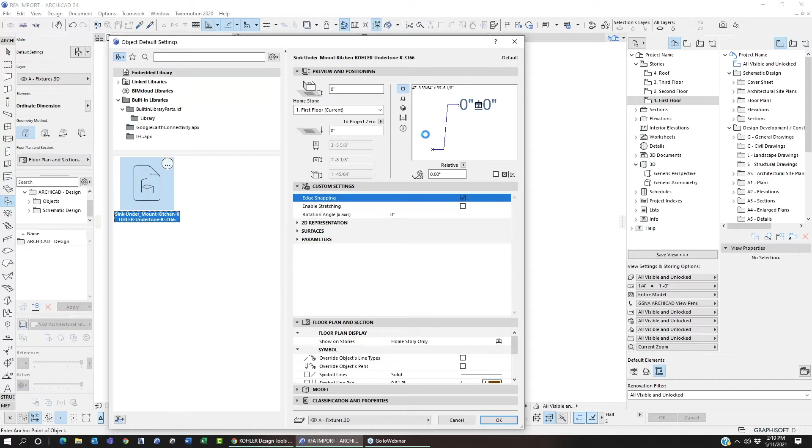And there it is. So it's just said that it's been created and it's been added to the embedded library. I'll hit OK on that. Go to the object, double click on this, and you'll see here under embedded library that that part has been put into the library there, and it's got quite a few polygons here, but I'll just show it in 3D.

That's it, and it's got some information in here as well, some parameters that come through with it. We can kind of use this, and it has a few other settings in here which we can turn on or off, edge snapping, stretching, things like that. But I'll just hit OK, and I'll place it in here.

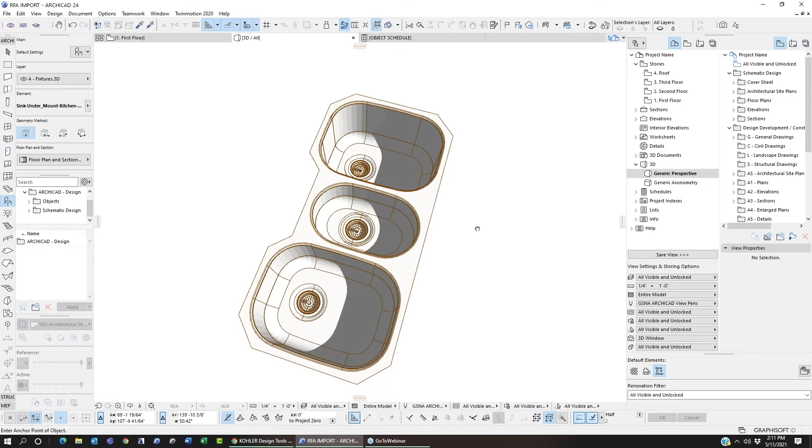There it is. Yeah, so if we just take a look at this in 3D, show all in 3D. Yeah, you can see there that this was just the medium quality, so it's not completely... it's a little segmented, but I think you'll find that it will still render quite nicely.

I'll just render it quickly here. So it'll show up pretty well here in a full render. The curves, the segments are pretty unnoticeable, and the quality is really pretty good.

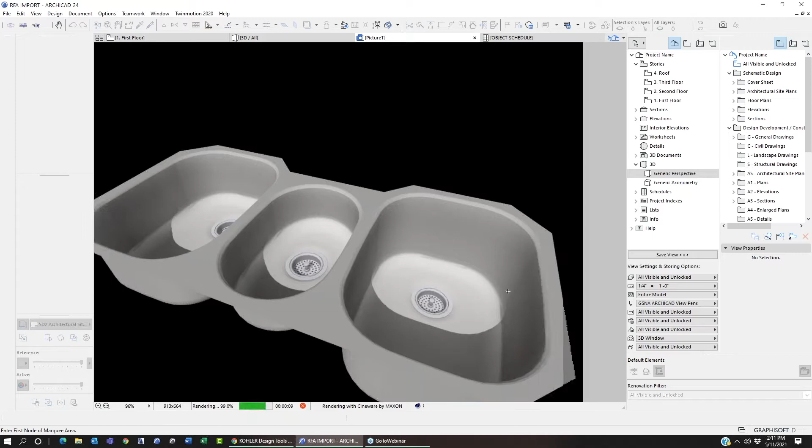And also I've got a schedule here, and this will just list out some of that information, those parameters that were available for listing. So you can pull this information out into either a schedule or into labels. So all that comes through as well. That's as easy as it is.

You just got to make sure that these RFA objects are not too old. I think we can go back as far as 2011 up to 2020, I believe, is the latest one that we have. So if you're having trouble with it, it's probably because it's a really old RFA object. But if it's reasonably new, then it should work just fine.

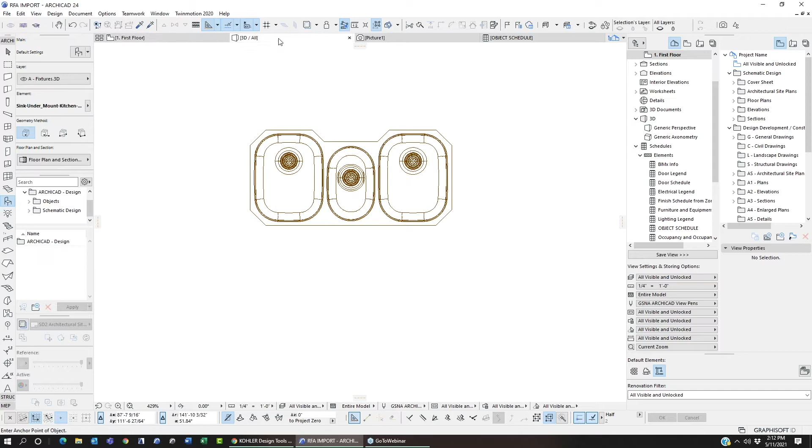Yeah, thanks, Link. And as Link pointed out, there's a ton of manufacturers' objects out there in this format. This add-on is very simple to use. Again, it's free. You know, use it in your toolkit.

What we'd like to do now is introduce Tom Simmons from ArchVista, who's going to take objects to another level with a great add-on called Modelport that I know Link and I have a lot of our clients that use. So we're going to turn it over to Tom here, and he's going to show you how you can do amazing things with a wide variety of objects with this add-on.

Tom, I just switched over to you. Let me know if you're all set. I've got it. Thank you very much. Perfect. So let me just go ahead. You can't hear me? Can anybody hear me? We can hear you. Okay, so everybody can hear me. All right, thank you. Okay, so let me go ahead and show my, sorry about this, guys. Looks like it's showing on the wrong screen. So I'll go to the main screen.

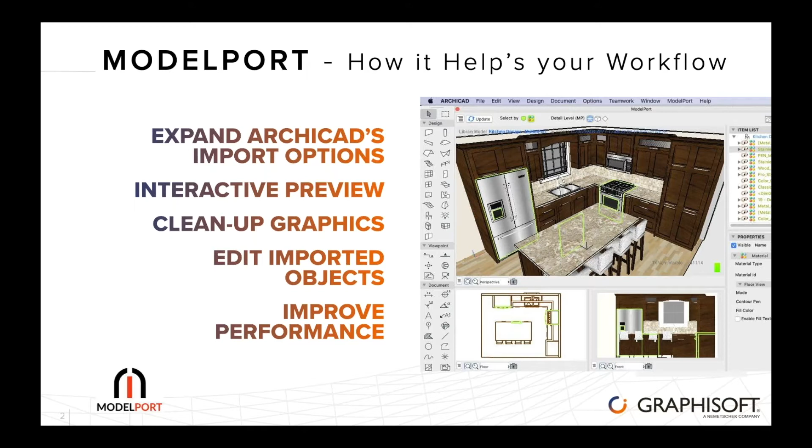Okay. So yes, let me just go ahead and take you through this. My name is Tom Simmons. I'm with ArchVista, and I'm going to take you through Modelport. Modelport is an application that we developed with some developers, and I'm going to take you through how it expands some of the import objects, offers interactive preview, cleanup graphics, edit import objects, and improves performance.

So let's just first start about expanding the import options. So many of you talked about bringing in SketchUp files, Revit files. There's a lot of file formats out there, and one of the reasons why this was developed was that a lot of people want to bring in even additional objects beyond SketchUp and Revit, and also be able to manage those objects in terms of graphics, in terms of performance for polygon counts, file size, etc.

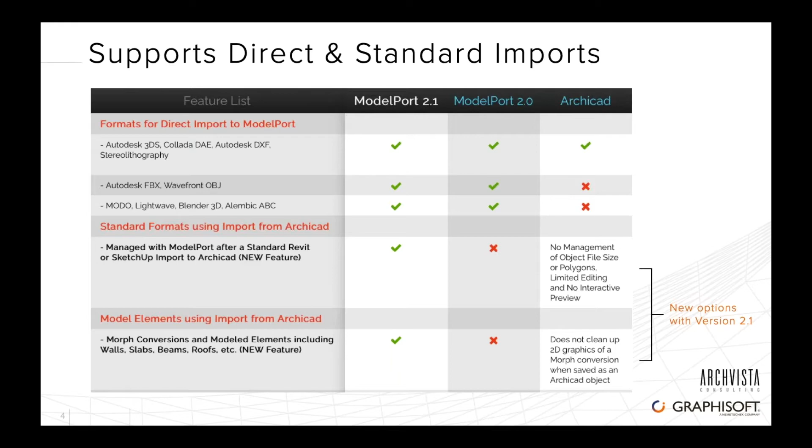And so we developed it for that purpose, and we just recently added, as was released just the last couple of weeks, additional formats. So you bring in a Revit object or SketchUp object through the standard method you would in Archicad, and now you can bring that into Modelport to use the editing features and the management features there. And then you can also likewise bring in morphs and other things that I'll talk about why that's important in a second. Let's talk about the direct import first, okay?

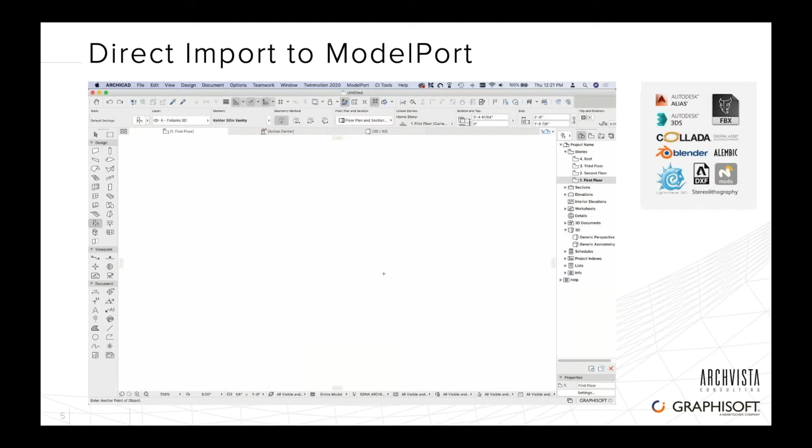If we're going to use Modelport to import, let's say, a 3D model using the DAE format. Now, the DAE format, if you're not familiar with it, is a standard format in the SketchUp 3D Warehouse. So you can either download SketchUp formats or the DAE. It's a Collada DAE format. And so you can see it brings it in pretty cleanly using Modelport in that format.

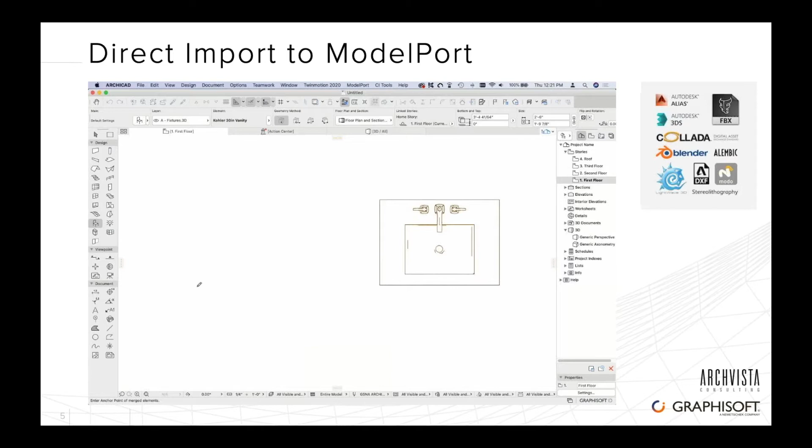But if we use the standard SketchUp format from the 3D Warehouse, this is going to look very typical of what you would probably see with any object that you're bringing in from SketchUp or any other format that has curves to it. And that's that you're going to see this sort of triangulation in the object, both in 2D and 3D, and it can get really messy. And that's part of what we tried to do with Archicad with ModelPort, is to try to clean up some of those graphics.

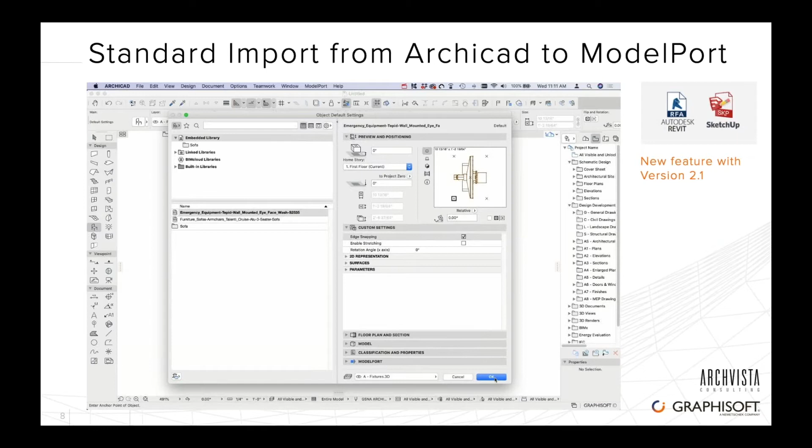We also recently, as I mentioned, allowed now for you to be able to import an RFA or a SketchUp file using the standard Archicad process. Now, why would you want to do that? Well, first off, let's say, for example, you have a Revit object, and it comes in, and it's great, brings in all the stuff, except that there's something wrong with it. Perhaps it's rotated in the wrong direction. Something that happens a lot of times: people leave things on that you can't turn off. Various reasons why.

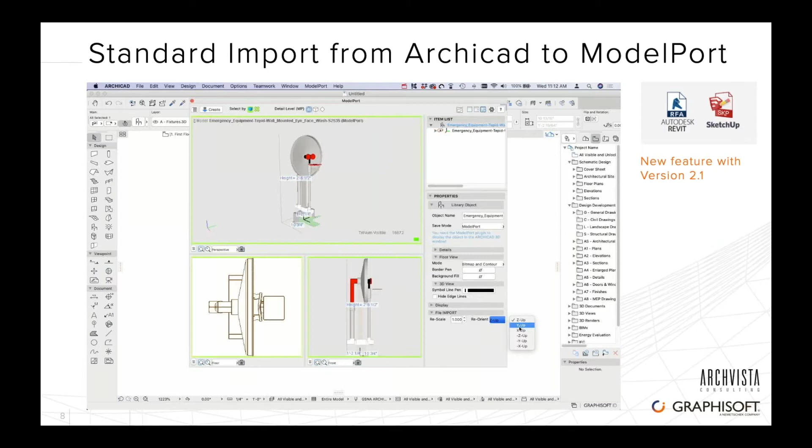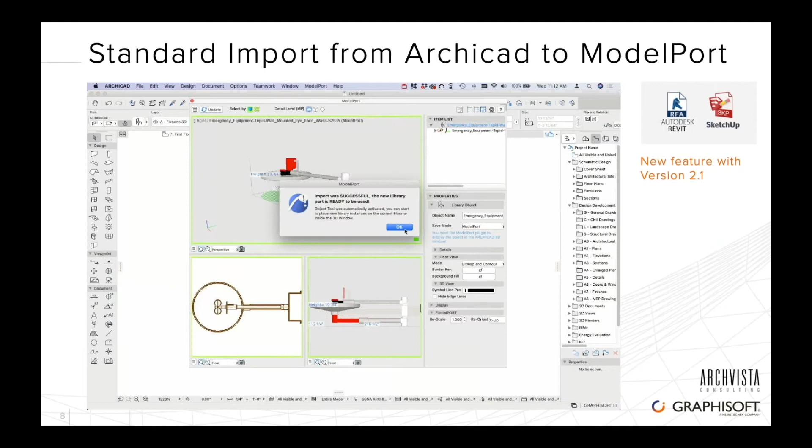And so you could explode that into a morph, edit it like that. Or with Archicad, with ModelPort now, you can also just import it directly into ModelPort and begin to use ModelPort's feature set to be able to change, in this case, its rotation, but you could also use it for editing the graphics, as I'm going to show you in a second, and some other options as well. So here we've imported it to ModelPort, and so we'll just basically delete that Revit one that we brought in, and we'll just place the one now in ModelPort, and there you go.

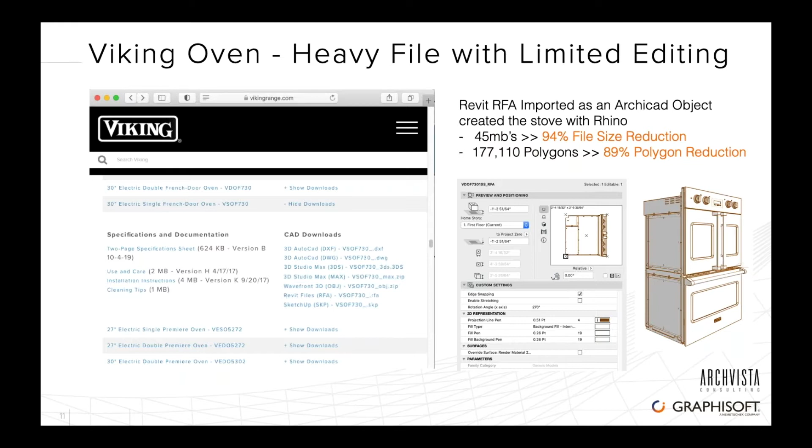So what can you do with that? Well, that's what I'm going to kind of show you. You can actually use ModelPort to reduce the file size, you reduce the polygon count. I'm going to talk about this process. So let's take a first look at what you could do. You could bring an object like this in, and you can convert it to a morph. You know that when you convert it to a morph, sometimes it will actually have a massive amount of information also, because the morph becomes, as this warning is telling us, it can decrease the performance of your project. So here's how you can handle that.

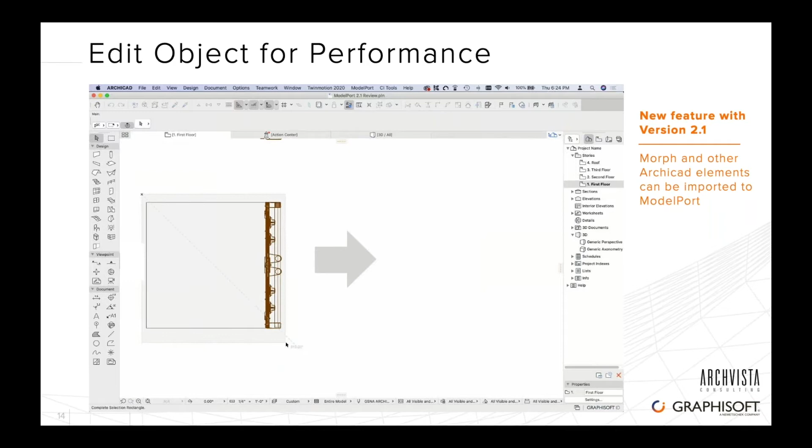This is a good example. We brought this in, we've converted it to a morph. So what we're going to do to kind of help start to simplify and increase the performance of this object, I'm going to delete the back side of it. I don't need that. I'm going to draw a slab as a representation for the back part of that oven. And just by doing that, I've already decreased this by about, I think it's about 60, 65% in size.

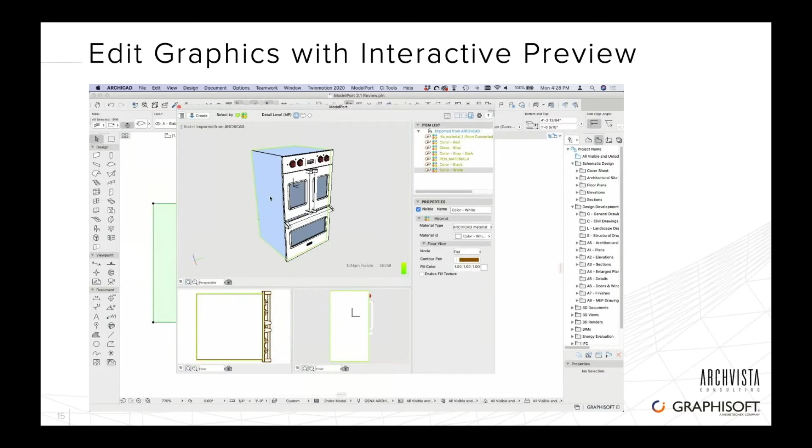I'm going to import that in now to ModelPort, and you're going to see once it comes in that rather than it being 177,000 polygons, it is now 58,000 polygons. So good first step. Next thing we're going to do is this object, when it came in from Revit and from Viking, really didn't have any colors to it. So we're going to start adding colors, adding materials, begin to add some graphics to this and edit the graphics for it as well. And then we can zoom in.

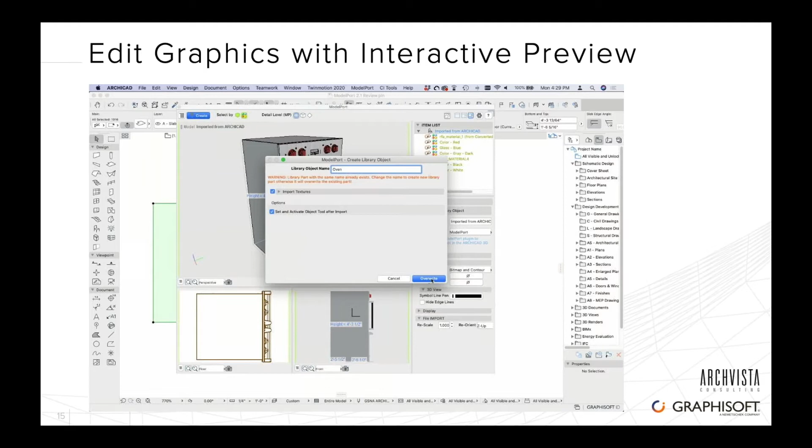This is an interactive preview. So we can click on any surfaces, any elements in here, and begin to edit those. And so here we're going to actually go ahead and change these handles to a darker metal, maybe black. And again, start to build this up, right? So now I'm going to go ahead and create this object. So now I've taken this morph, a Revit object, converted to a morph, and now I'm going to make it into a ModelPort object from this point forward. Okay. Once this is done, and this object has been created, I can close this.

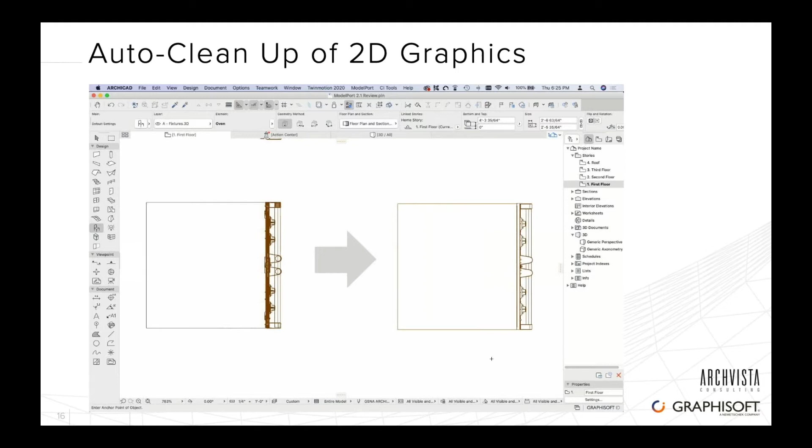And I'll go back to Archicad. And now at this point, we're going to go and place the object. And notice how much it's cleaned up too. After taking that morph, bringing it into ModelPort, just like we did earlier with the SketchUp object, using the DAE format, it's cleaned up the graphics in 2D and 3D. So next we want to reduce the polygon count.

Another new feature that's been added, because we can now bring in morphs and other elements, is we can go through and select all the meshes at once versus having to select each individual one. So in this case, if I want to reduce the polygon count, I want to select all meshes. I can select all meshes, and then I can deselect by holding down my Shift key.

I can deselect some of the surfaces so that when we start to reduce the polygon count, it doesn't create triangulation on those surfaces. So I'm going to select what's called poly reduce down underneath the detailed full panel. And then once I've done that, I'm going to change the decimation steps here, okay? So you can see there, this has reduced it down to now 19,000 polygons, down from 177,000.

Huge amount of difference. I can even take it further, down to 14, but I don't really need to take it that far. You can see it starts to create some little triangulation there, so I don't really want to do that. So I'm going to take it back up to 2, which is the default. And then I'm going to go ahead and freeze the poly reduce. So I'm saying I want to now update this object with that. And then finally, I'm going to update the object itself, and we're ready to go.

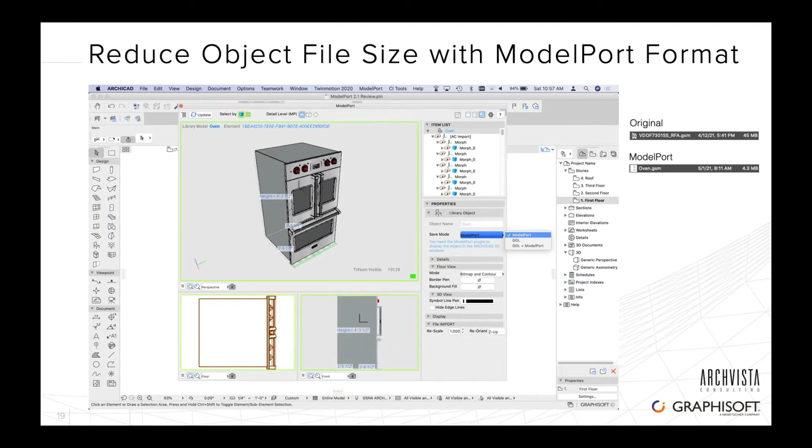Next, I also want to reduce the file size. Again, this is a pretty big object. Just as a single object was 45 megabytes. When it comes into ModelPort, we have the option to be able to set the save mode to ModelPort versus the default GDL format. Just by doing that, I'm reducing it also now back down from that 45 megabytes that we started with down to 4.3 megabytes in this final file that we're creating. Huge difference in the two.

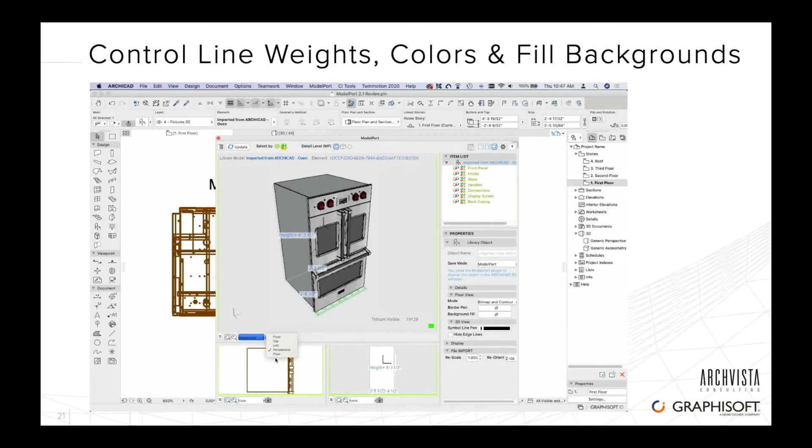We can also control line weights, colors, and fill backgrounds with these objects when we bring them in. Now, when I brought this morph in originally, you can see it's kind of true line weight mode right now. But when we go into ModelPort here, we can start to actually change our preview to show the plan view on top. And now I can start to select the areas that I want to change. So maybe I want to change, for example, the casing in the back to have some gray fill background so that we can change that.

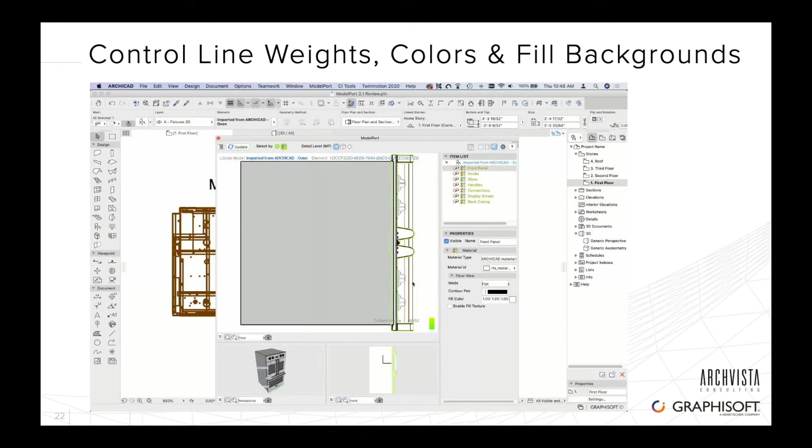Maybe I want to change the line weight of the stoves to have a heavier weight around the edge of that casing and the edge of maybe some areas up top that are closer to you. Maybe I want to gray out some of the areas that are below, so those kind of fade away. So again, I have control over here on the different materials that are part of this. And so by updating this now, what I'm going to see is a gradation of the different line weights within this object, giving me a much better look and feel for what I want to see in the end.

So final result here, it's giving me more options for importing different objects. And now with this ability to be able to take objects and bring in morphs and be able to add additional slabs and whatever to replace things to improve performance and even alter those objects, I can take something like this and I can reduce it down 94% in file size, 89% in polygons, clean up the 2D and 3D, edit the object, pen customization, material texture editing, etc. So you can see the results.

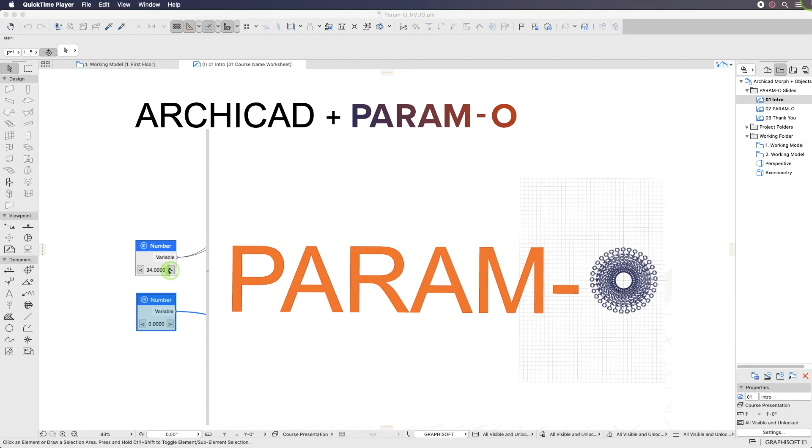Let's talk about PARAM-O. PARAM-O is amazing. It's now built into Archicad and it's fun. But you may be wondering, what is it? Well, it's a new way of creating parametric objects in Archicad without coding or scripting. Grasshopper fans will be at home with the graphical interface. Here are 6 important aspects of PARAM-O that make it easy and accessible. Number 1 being it's built in for both Windows and Mac users.

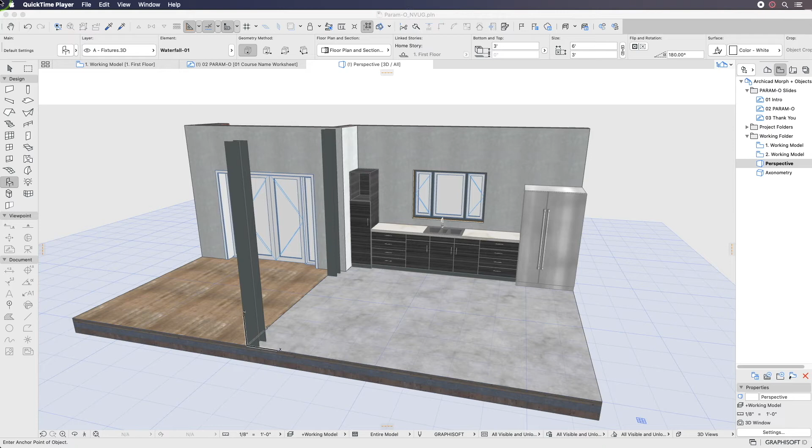Now let's put PARAM-O into action. Here's the example kitchen layout we'll populate with PARAM-O objects. We'll open our new island object. Check out the PARAM-O icon. Here are some toggle display parameters created by PARAM-O. Now we'll place the island object and adjust some size parameters.

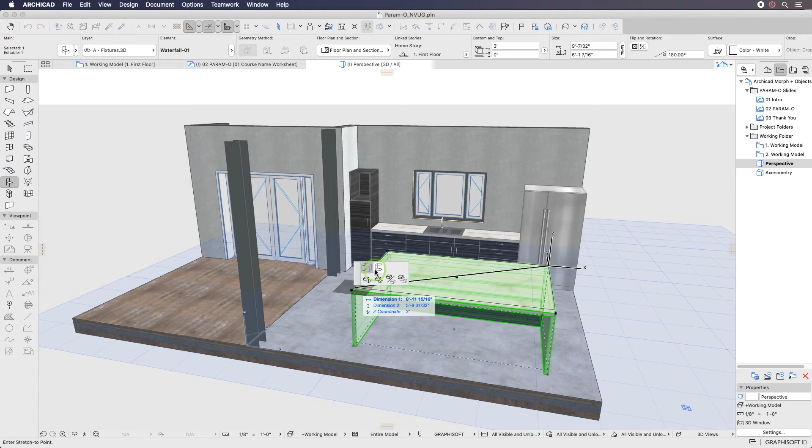Just like the standard objects, you can apply favorites to the PARAM-O objects. We'll move this island to align with the existing kitchen counter and make a quick adjustment to the counter thickness.

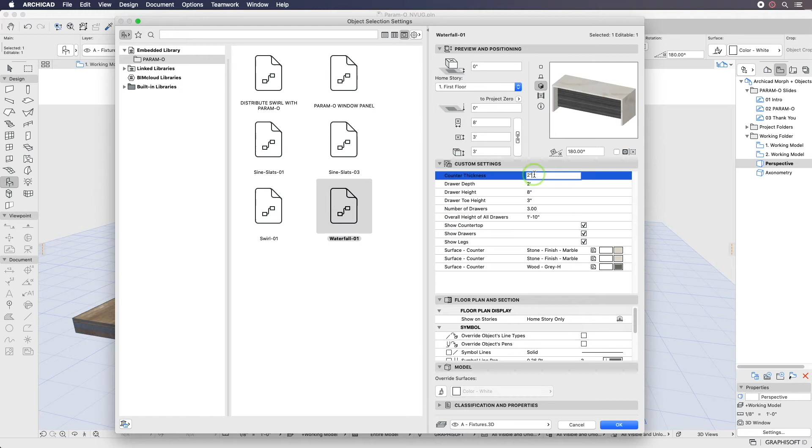Now let's open up the PARAM-O Manager and edit this object. In the PARAM-O Manager dialog, you'll see an active list of the objects available to edit, rename, and delete. Now in the PARAM-O Editor, you'll see 3 columns: the list of commands and inputs, the node diagram, and the 3D preview. By the way, the 3D preview toggles to the automatic script generator, not that you'll ever need it.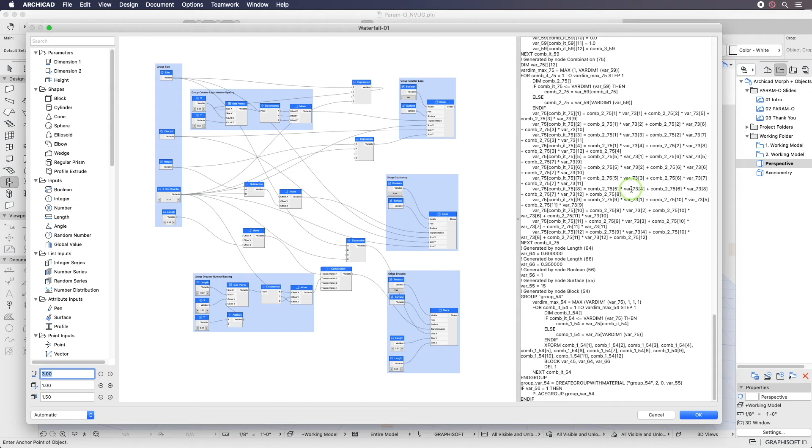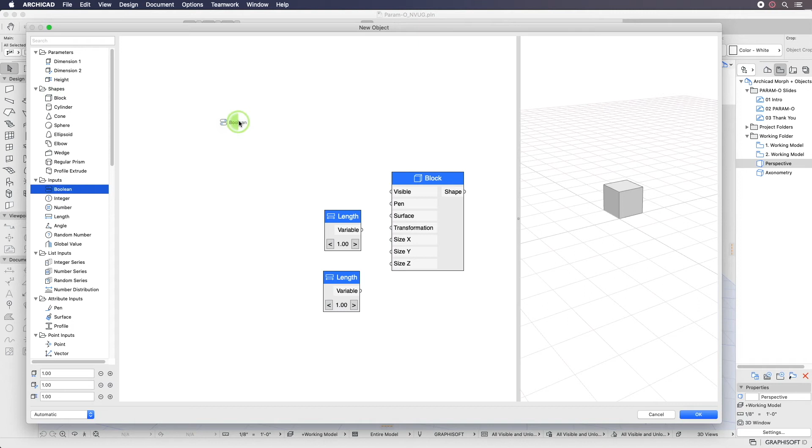The node diagram can look like a spaghetti mess, but we're going to start a new object to show you how it's done. The block is the best item to begin testing. We can control its size by adding some length parameters. Then a boolean to turn it on and off, and a surface material, which we'll attach to the block with a connecting spline. Lastly, we'll test out the length parameters.

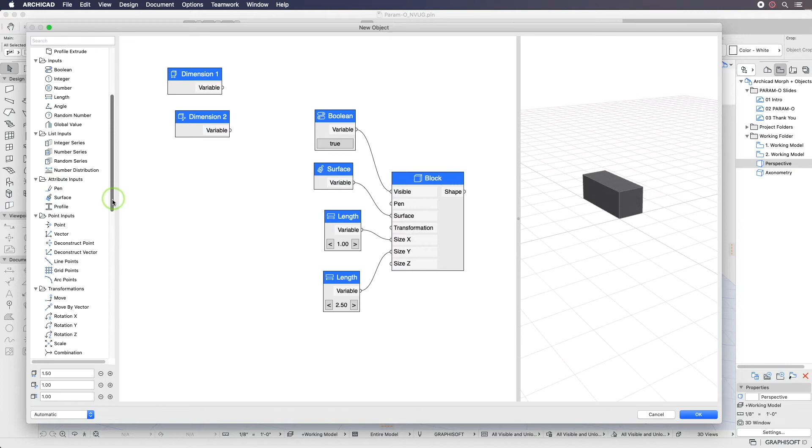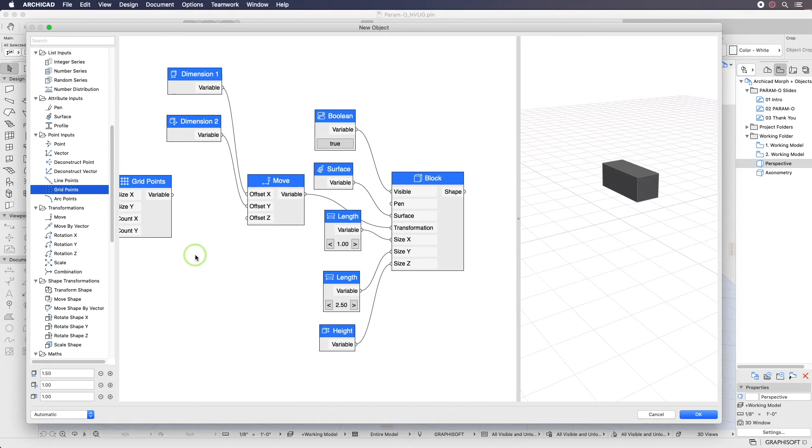Here's where we add a few dimensions to control the movement or location of the block and add a height parameter. And a quick test. PARAM-O's power comes from how it can work for you. We're going to multiply this block in a matrix grid and control the repetition sequence. You can double-click on the nodes to change the settings. In this case, I'm adjusting the step to be by 1 instead of half.

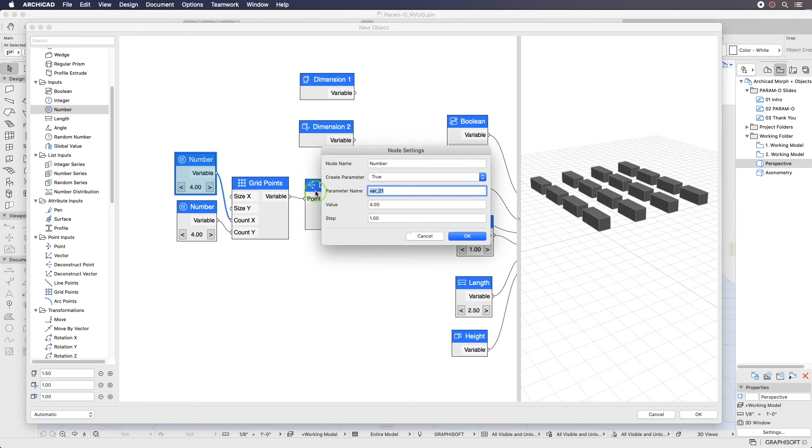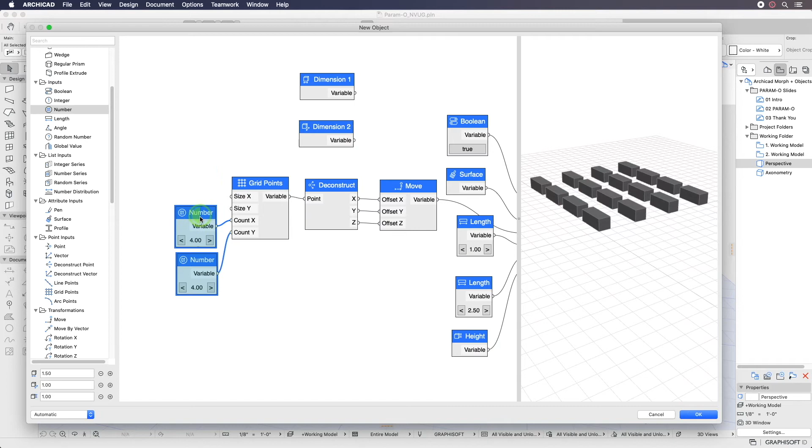I forgot to mention in the node settings, if you set the create parameter setting to true, it will then be displayed in the object selection settings. Of course, you can customize the parameter name to whatever you like. Let's do a little bit of organizing, change the grid size, and adjust the block placement. To continue organizing, you can select a bunch of nodes, group them together, and customize the name of the group.

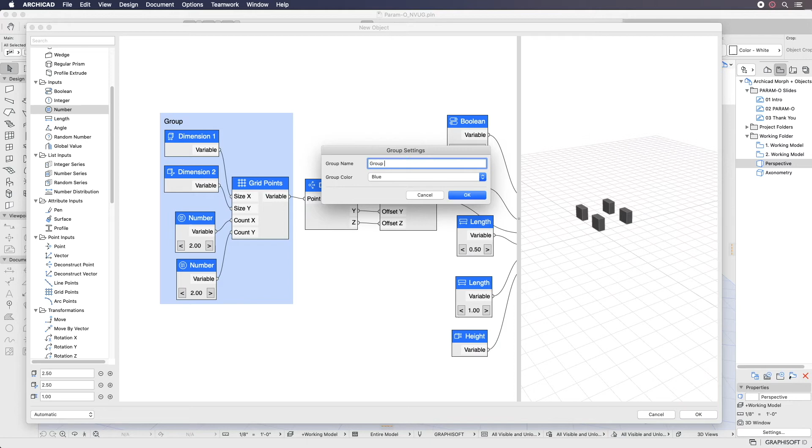I think we're ready to save this object and test it in the model. The new object will be displayed in the PARAM-O Manager and eventually be saved in the embedded library. The new object gets placed, but we probably don't need a bunch of stray blocks in our model, but some stools at the island would be useful. Let's open the object in PARAM-O and edit it.

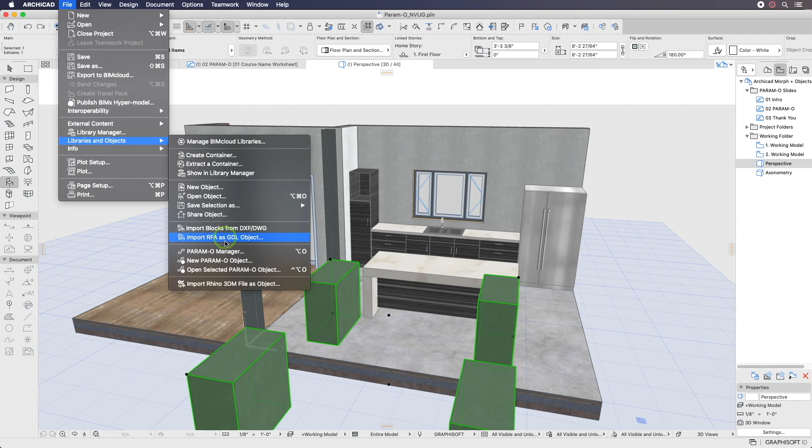What we can do is swap out the block item for an existing object in our loaded libraries. I'll take advantage of the boolean command to turn off the block item and then add a new spline to the GDL object of the stool. The stool spacing is way too far apart, but we can easily adjust that in the object selection settings. While we're in there, we can make adjustments to the spacing and the number of items.

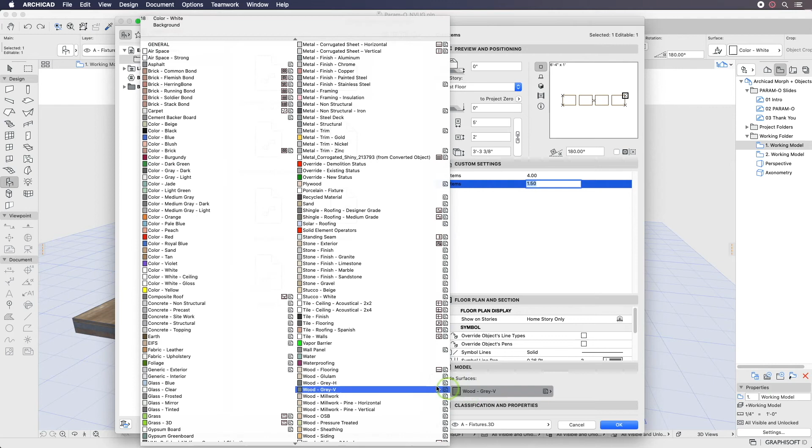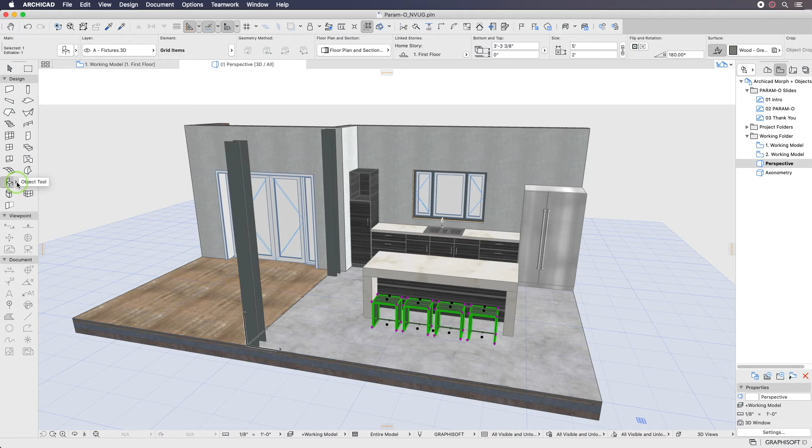With a bit more adjustment, these 4 stools could become 400 chairs, bleachers, or an auditorium full of seats. They could be elevated, rotated, or distributed along an arc. PARAM-O fully shows its power when it easily automates the repetitive features in design schemes. I'm going to show you another object that builds on that mindset. Here we have a series of panel slats that follow a sine curve. Here we can edit the PARAM-O created parameters. The manual entry of data works just fine, but it's not quite as smooth as a dedicated editor.

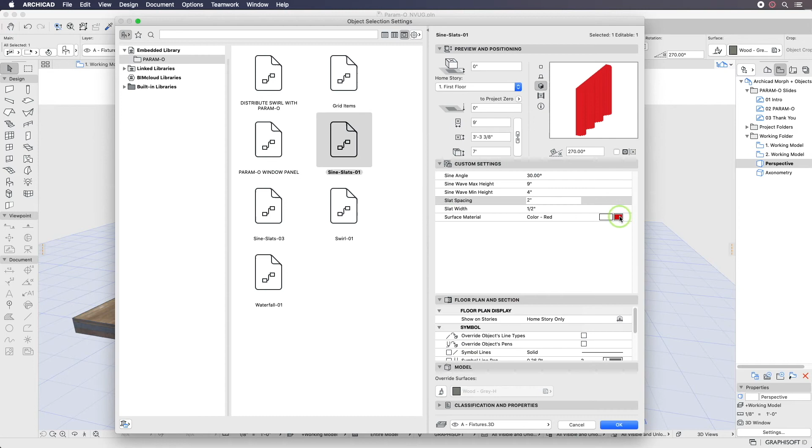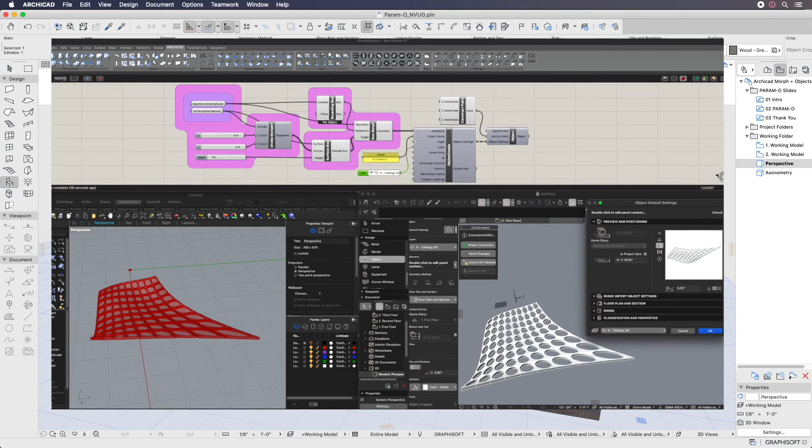Once we open the object in the PARAM-O editor, modifying things in the node diagram is smooth and provides great visual feedback. Watch how that sine curve undulates. Let's add another PARAM-O object to create a custom countertop. Here we can edit different aspects of the circle pattern. To take a quick tangent, in Grasshopper we can control object parameters in much the same way as we're doing here in PARAM-O. The combination of Rhino, Grasshopper, and Archicad gives you endless creative possibilities.

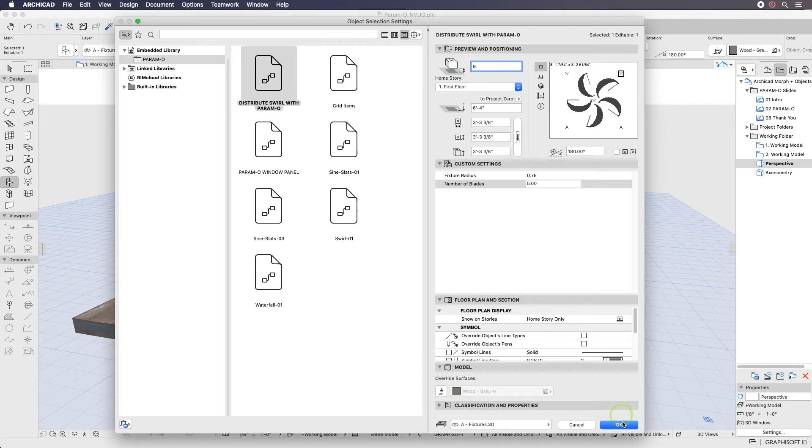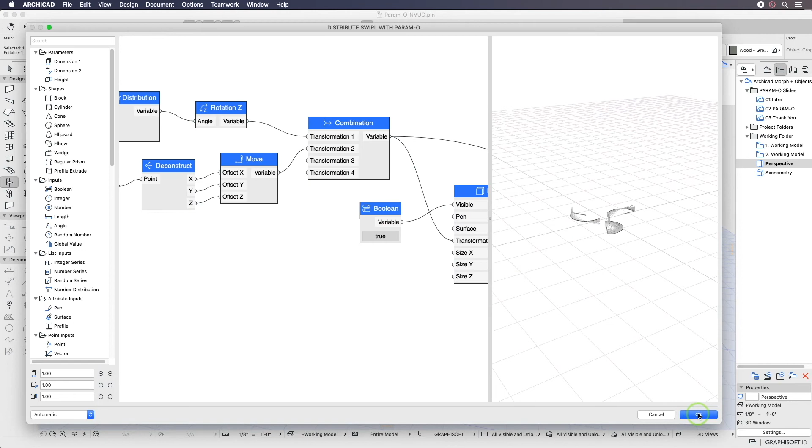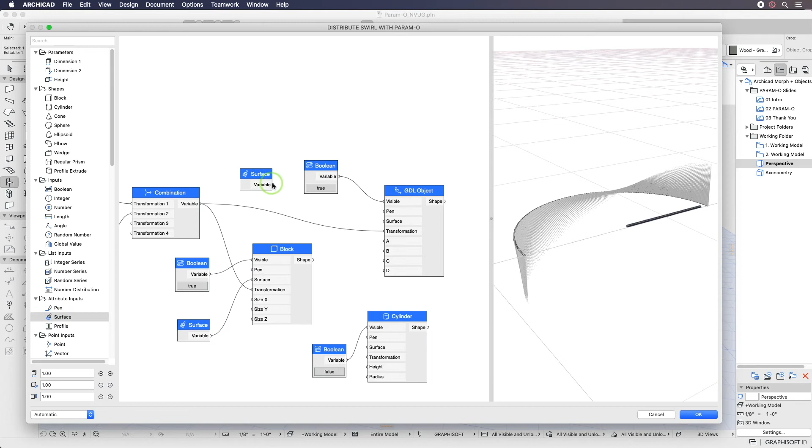Okay, so I thought we needed a nice geometrically abstract light fixture to go in this kitchen. I was experimenting with curves and arcs and having simple shapes rotate progressively around them. Now I didn't try to match this example fixture very closely, but I did find the gentle sweeping curves and the repetitive elements a nice challenge for PARAM-O. As you look at just a single blade of this fixture, you'll see that it's made up of hundreds of tiny little arcs, actually 180 of them, each one rotating 1 degree as it goes from straight up vertical to straight down.

We'll change the number of blades back to 5 for the kitchen. The embedded library will get updated and the kitchen light fixture will be modified to show the latest surface material changes. That concludes my 10-minute introduction to PARAM-O. I hope it sparks some interest in a fantastic new way to make custom objects.

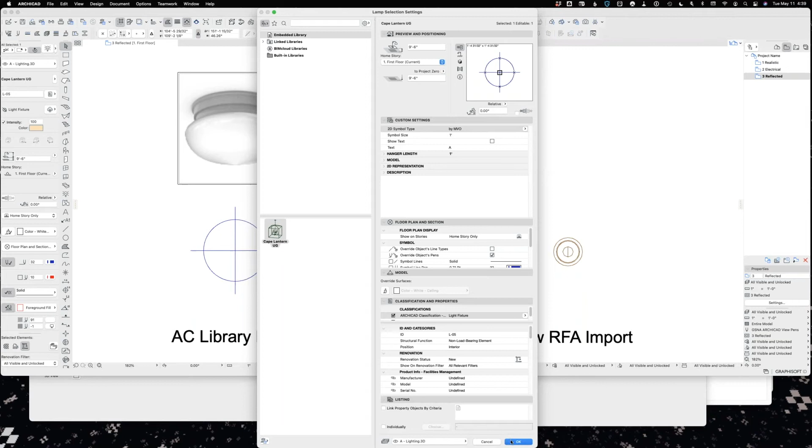So first example, here's the previous time. Imagine that I did this. I made a lamp and I've got settings in there. They're not the full UI because that's too complicated for me to do, but you can see I've also got that MVO option and then the other electrical symbol options that I've added to a model that I made myself. All right, so I'll show you how to add those parameters and the little bit of script that you need to make that work for anything that you might import.

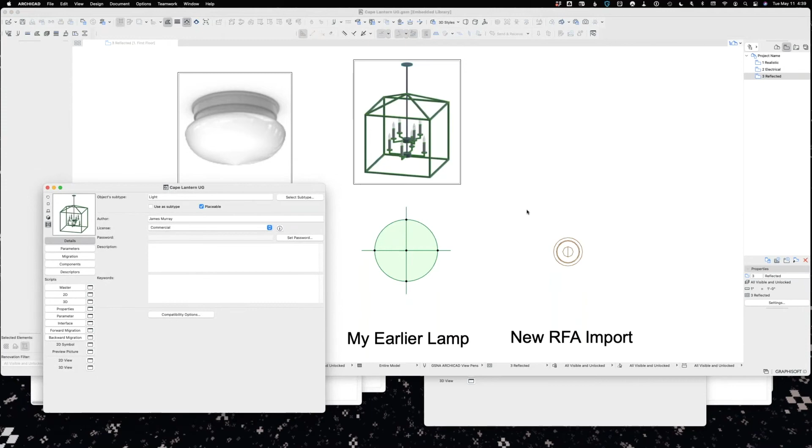So the first thing we got to do is open the object, and that's File, Libraries and Objects, Open Object. And that'll take you to the object editor. And then I'll also open what I've got over here, which is a new object that I imported using the RFA importer. So I'm going to open that as well over here on the right.

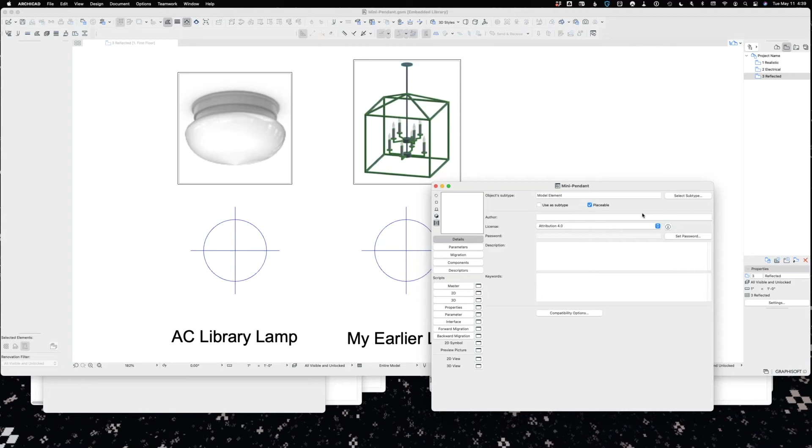And the first thing I like to do: all RFAs, they cannot come in as lamps. They can only come in as objects. If you want it to behave like a lamp and be available under the lamp tool, which I like, you have to change the subtype. And so go to select subtype and then unfold a little bit under model element. And then under electrical element, you'll see light. And that is the subtype for a lamp. So it'll now respond to the lamp tool.

All right, and then the other thing we need to do, second button here in the sidebar, so we'll go to the parameters and we're going to make some parameters. I'm going to put these new parameters underneath 2D representation here in the parameter list. The parameters are the things that are available to the user when they go to the settings dialog. So these are the things that you set in the settings. So in order to make a new one, you hit new. And then to make it really easy, I'm always working with what I did the last time. So there's a handful of parameters here that you need.

And the first one is this gs_symbtype_2D_m. And that's the variable name. That's the name that the code uses to refer to this information. It's not the name that the users see. And then parameters have types. There's several types that they can have, and this one wants to be an integer, which is the little stack of blocks there. And then the name that faces the user will make that 2D symbol type.

All right, and then I need another new one. This one's simply called SS, and it is a length, and that is the symbol size. And that is a model dimension. So if you're working at 1/4 inch scale, make it a foot. That'll make it a 1/4 inch in the drawing. And I'll make another new parameter. This one's called SHOW_TXT, show text. And this one is a checkbox. So you have the option to turn it on and off. And so that'll give you the opportunity to have text showing next to the symbol or not.

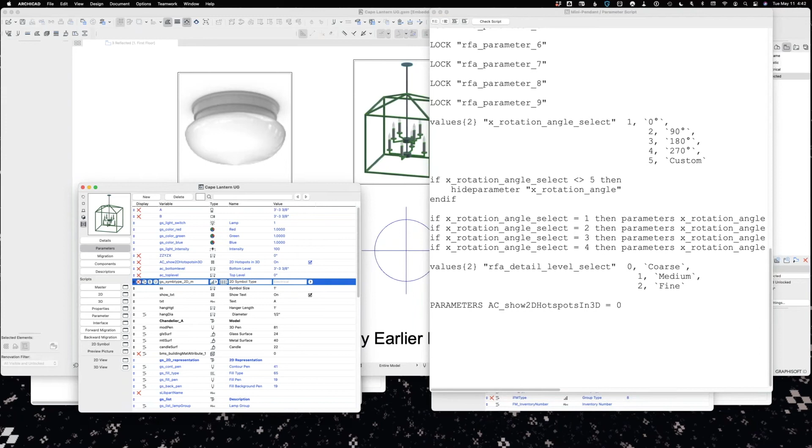This is terrifying looking auto-generated stuff that the RFA importer made. But I'm going to scroll all the way to the bottom and ignore all of that, and come over to my previous lamp, open its parameter script, and I've got this little block right here which starts with the word values and this and 2. Then you'll see that this parameter is one of the parameters we created, and this code is going to say add this list to that parameter.

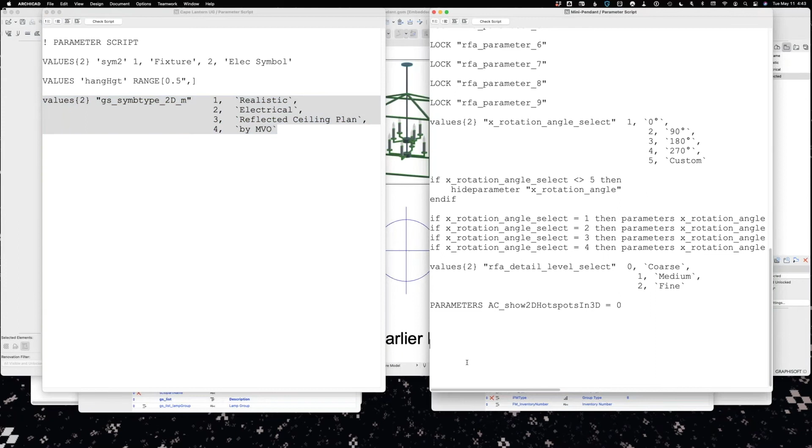So I'm just going to copy that and paste it into the parameter script at the bottom. Then if I come back out to editor headquarters, you'll see that now this parameter has got those 4 options. I'm going to choose it to default to MVO because I think that's the best way. So however you save this, that's the default the user sees when they start using it.

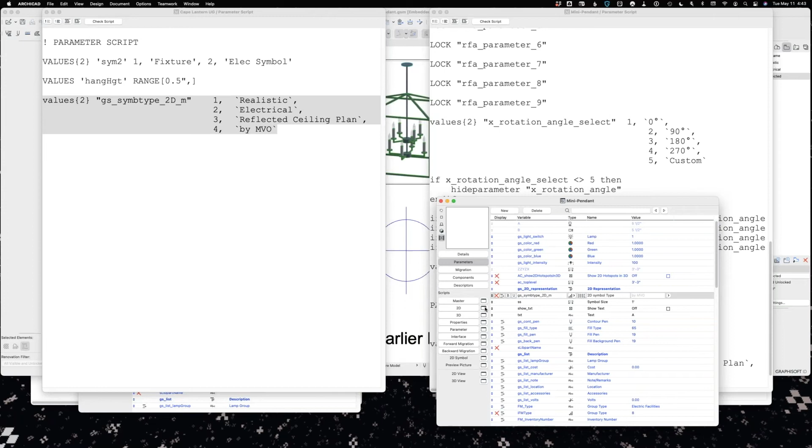And then the second script we need to deal with is the 2D script. The 2D script is responsible for what the object looks like in plan. Again, this is auto-generated stuff, and I'm going to just select all of that and get rid of it.

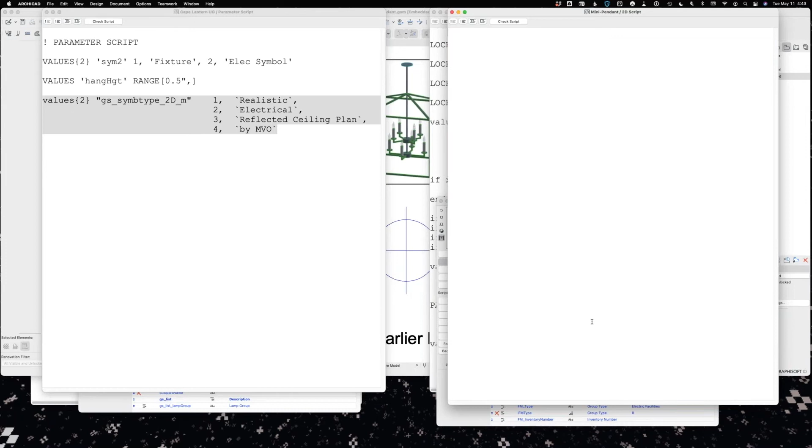Back to my previous lamp, I'm just going to select all this, copy, and paste it. So very briefly, without getting into a lot of technical detail, basically this script - you'll see the word 'if' every now and then. And what that means is, depending on what that symbol type parameter the user chooses, it's going to do different things.

If you choose to show it realistically, it's going to use this line here called Project 2, which just means take a picture of the model. And then down here, if you're using any other setting, it's going to essentially call another hidden object in the library and instruct it to draw the right kind of symbol for you.

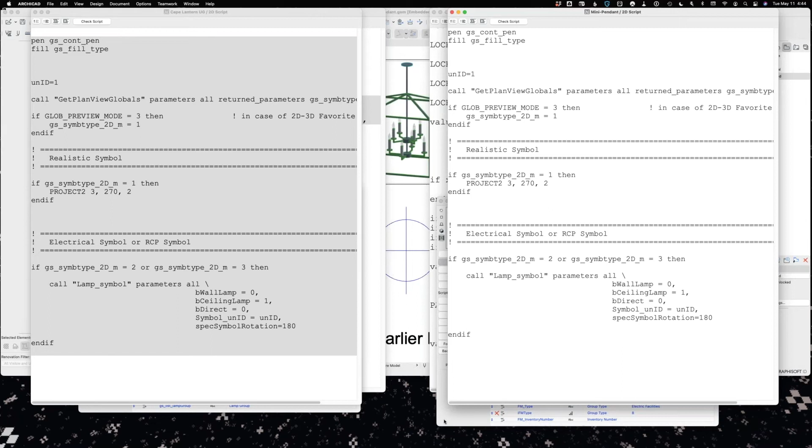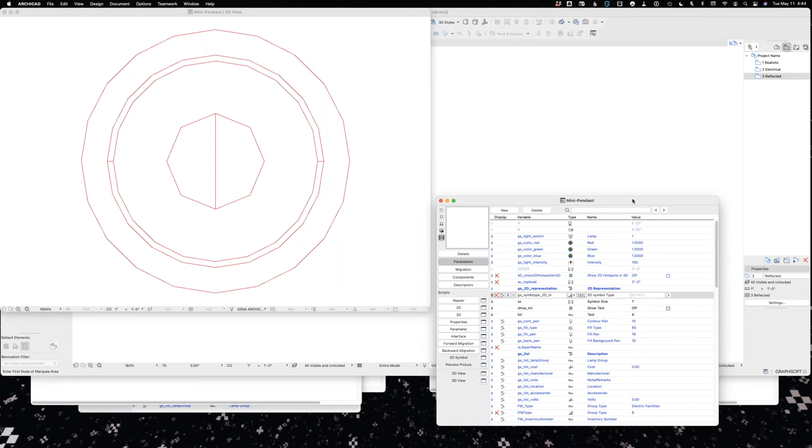And so then if we come back out and look at 2D view, we can see that if we choose to look at it differently, the symbol will change. And again, I want to leave that on MVO. All right, and then I'm going to save this real quick.

And then I will go back to the plan and get my lamp tool. Whenever you save an object, it'll always be the default for whatever the tool is. And so there's my new lamp. I've got a few views saved over here, so I've got that MVO setting hooked up to views, and I can easily click these to switch between the different symbols. You can see that Archicad library, old object, new object - they're all speaking the same symbol language.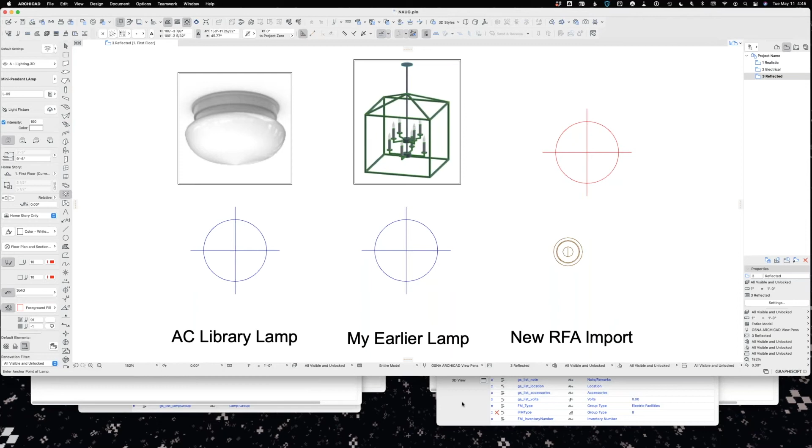Catherine, if I have 1 or 2 more minutes, I can show 1 or 2 more little things. Yes, please - there is actually a question about it, so go ahead.

All right, so one other thing I want to show you is let's look at the 3D script. Actually, first let's look at the 3D view of the object, down here. So I'm not sure why, but this guy imported upside down. That should be a pendant, and it's - I don't know what you call it when a pendant is standing up. But that's easy to fix.

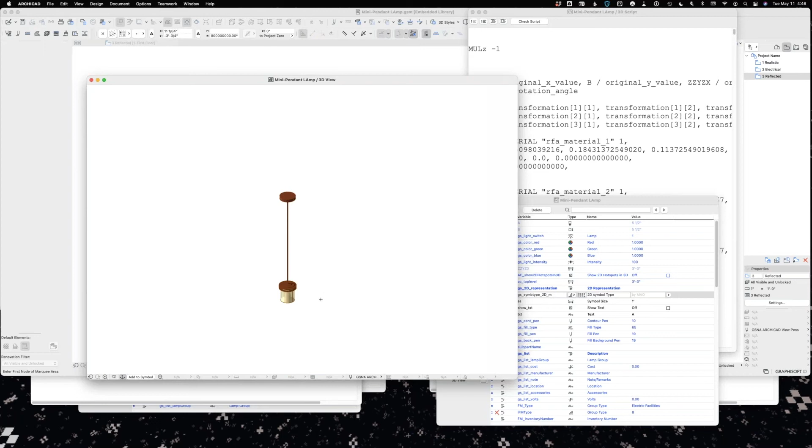If I go to the 3D script, the 3D script makes the model. Again, this is all auto-generated stuff from the importer, and we're going to ignore all of it. I'm going to go all the way to the top, hit enter a few times, and then type MULZ, -1. That command simply makes the whole object mirror itself along the Z-axis. So then if I go back to 3D, we've now got the pendant fixed. If that ever happens to you, for some reason it imports upside down, that's a really easy fix with a very small amount of typing.

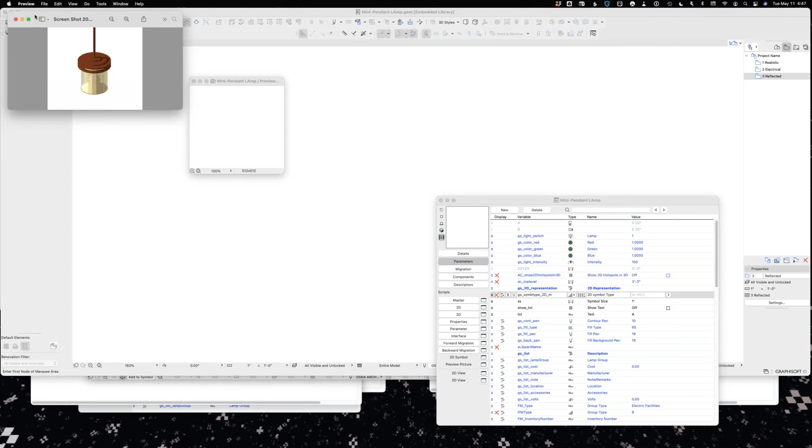One more thing that's nice to do when your library is getting bigger is create a preview picture that users can see when they're browsing the library. That's this button right here on the sidebar. It's empty right now, but I've got a screenshot saved here of my lamp, and I'm just going to select all that, copy it, and paste it into the preview. Now you can tell what you're looking at when you're choosing it in the libraries.

So that's what I've got for you, unless there's a question or something. Hope it's helpful.

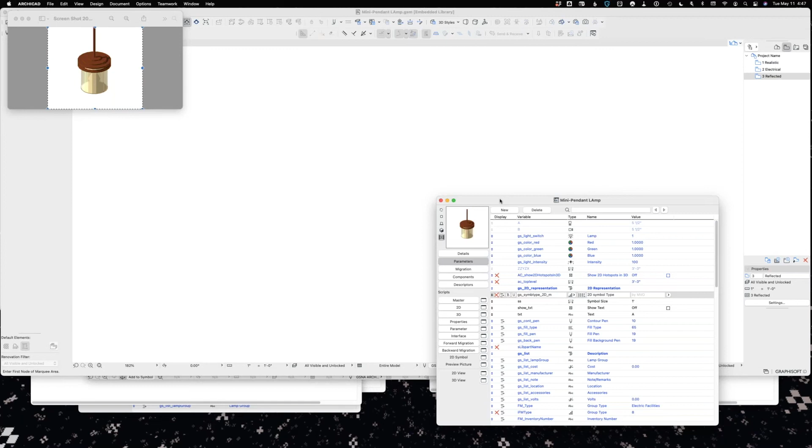Yeah, I got a wow, and linking the MVO setting this way is much easier than scripting MVO. Thanks, James, I already passed this on to Zoli. Zoli, are you ready? Yes, yes.

So let's talk a little bit about metadata. I won't be long, but the webinar today is about bringing in geometry from all of these different platforms, or creating geometry from scratch inside Archicad. And in my opinion, what really makes a product a BIM is obviously the metadata, the non-graphical data, or the I in BIM.

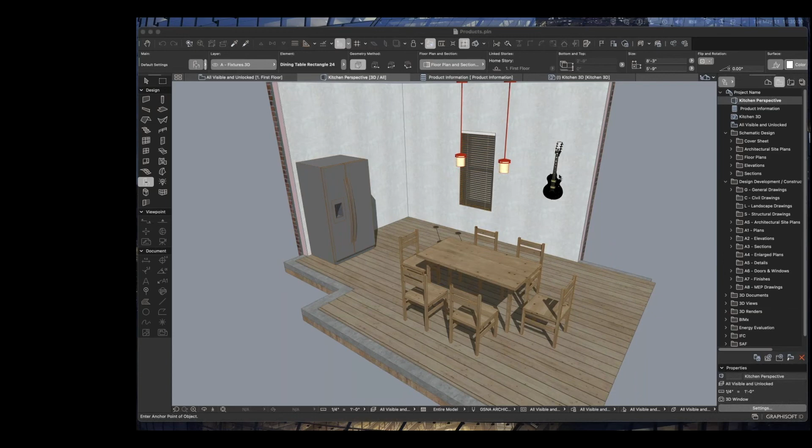So I want to show you how that's structured inside Archicad. I saw there are already some questions about this. So how do we populate that metadata? That could be anything that represents a product, so manufacturer, model number, color, material, sustainability data, and so on. But you can also assign it to a building assembly, like a wall assembly's UL number, or include some occupancy data in your zones. So you're not really limited in any way, and I think this is a fantastic feature set inside Archicad out of the box.

I'm using this little corner of a kitchen - I like to joke that this used to be my kitchen in my apartment in New York City back 15 years ago, but sad reality, this was my whole apartment. Anyway, if I go into that refrigerator here...

Everything that's metadata is structured around the classification. So that's one of the tabs here, let me expand that a little bit. Out of the box, you will see the Archicad simplified classification master format, but you can bring in any system based on your country or territory that you want to use. And as long as you classify your components correctly, they will get the appropriate metadata fields that we call properties. So at the user level, that's really all you need to do.

Now for the BIM manager to set this up, they will have to go to Options, and right next to each other there's the Property Manager and a Classification Manager. Just to show you the Classification Manager: when I select, let's say, site massing, and click on one of these items, it will only bring up the appropriate properties, and I can edit that list. Here is where you can bring in OmniClass or any other classification system. You can use multiple classification systems as well, and obviously you can map these onto each other, especially when you're outputting IFCs.

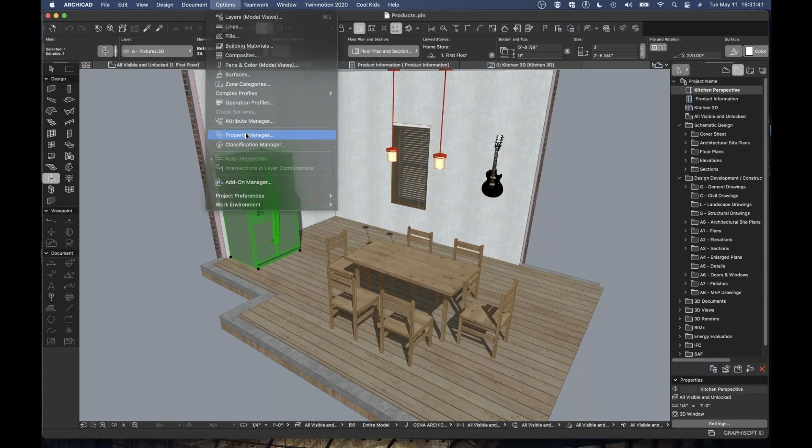The other one is the Property Manager. That's really the same data, but you're taking the point of view of the properties. So in this case, if I select, let's say, manufacturer, you will see all of the classification items that manufacturer is available for. A little bit about properties - they're a fantastic feature inside Archicad. They can be all these different types: a string, a number, an integer, different parameters like length, areas, volumes, even an option set where you get a drop-down list of multiple options.

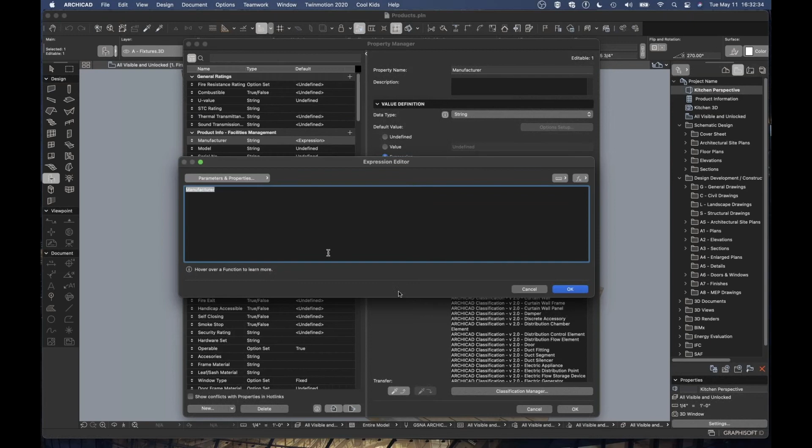And then also the kind of secret superpower here is that you can create expressions. So even if I wanted to map this onto a different type of manufacturer - let's say I have manufacturing in two places - I can just very quickly map it onto that manufacturing. Oops, I did it twice. And from that you can see I can combine multiple. So it's a very, very powerful part of Archicad.

Okay, I'm going to discard these changes and show you a better way to populate this metadata. One option would be to go into a schedule, and as we all know, schedules are interactive inside Archicad. So I could literally go and start typing in the manufacturer, the product website, and so on, whatever I want. But we want to open this up to people without Archicad - the specifier, the manufacturer - everybody has Excel. So let me show you how to populate this data from Excel.

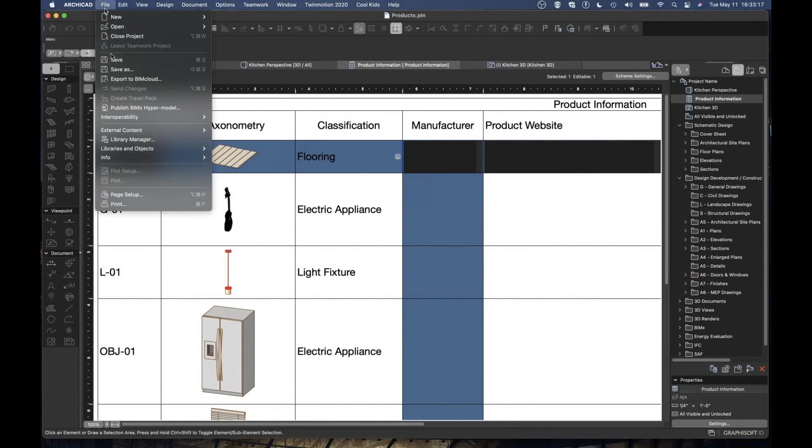You open up your schedule, then go to File, Interoperability, Classification and Properties. We'll have an export property values from schedule, and this will output all this data as an Excel sheet.

I'm just going to leave the stock name there, the out of the box name. And this gives me an Excel sheet that has the list, but also there will be one hidden row and one hidden column for the global unique IDs, or GUIDs, that will identify each component and each property, so that our data is always consistent.

Then somebody can go in and type in the specs for those products. Everybody has Excel, everybody can output a CSV file at the minimum. So you could even go to your manufacturer and get the product information as an Excel. Very easy - really opens this part of Archicad up to everybody.

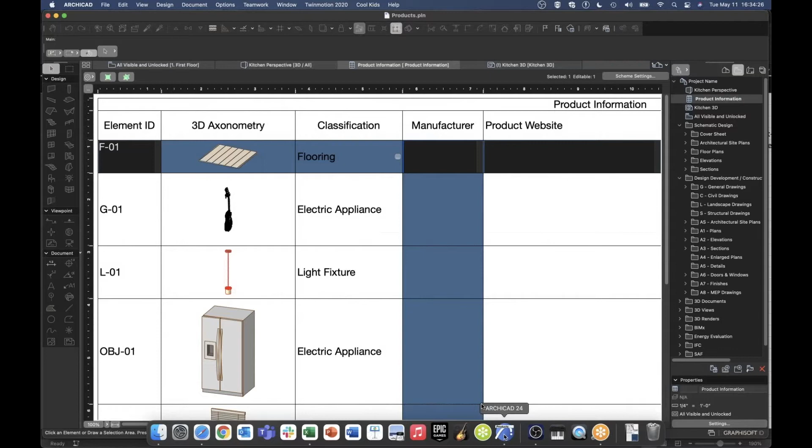So now I actually went ahead and populated this Excel sheet ahead of time so that I can show you. I spec this out with the product information. If I want to bring that into Archicad, all I need to do is go to the same place, File, Interoperability, Classification, and import the property values.

Now it will bring it up here. Just want to make sure I select the correct one. If there is a mistake, Archicad will tell you exactly where. And when I hit OK, it will start injecting all of that metadata right into the object. Consequently, the schedule will be correct because it picks up the data from the objects, from the elements.

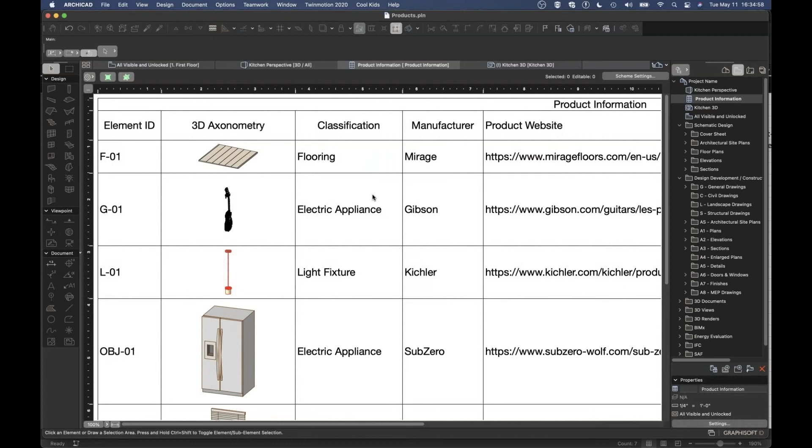Just kind of to go back into this model and show you that it also shows up here when I scroll down to manufacturing all the way - there's my nice little Sub-Zero call out, and then also the manufacturer's website.

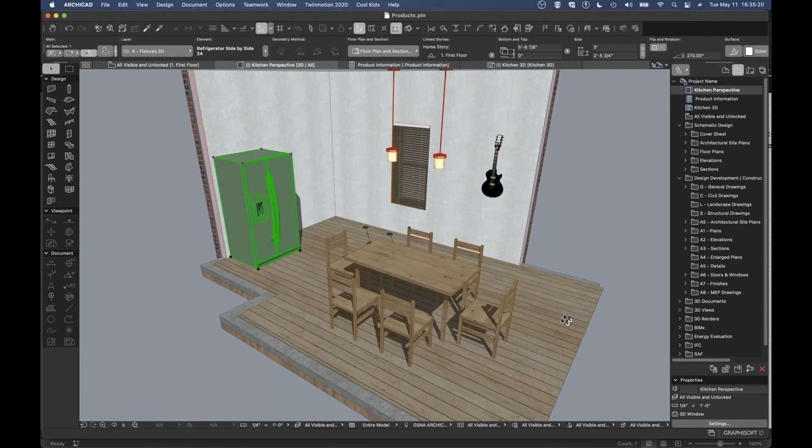So just a couple of use cases for this. This is fantastic, but obviously when you create a vectorial representation, let's say a 3D document, you can also use the auto text label to annotate all of this metadata. And also when you output this into BIMx, that will allow you to embed the metadata in the individual elements, so that when somebody clicks on them, they will have all of that data available, and they can go to the website directly from BIMx and so on.

So this is out of the box feature set to update metadata and populate metadata in bulk in Archicad, and then also open it up to anyone with Excel or through BIMx. Thank you.